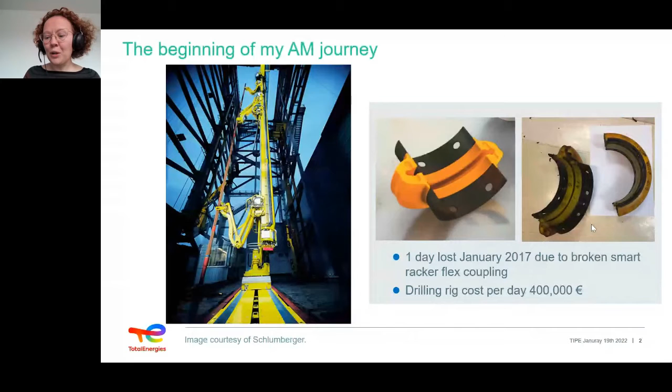Fast forward, this journey has moved from research and development into the digital organization of Total. I'll talk more about that in a moment, because Total Energies as a company is on a super exciting journey. What I've shown you so far is the old school days of drilling for oil and gas, and we're resolutely moving away from that into a super exciting future. This is a corporate slide that reflects Total Energies' new ambition, which is to be a major player in the energy transition.

Total Energies is committed to providing affordable, clean, reliable, and accessible energy. We want to increase our energy production while reducing the emissions associated with this production. And it's that challenge that we must meet with our customers, stakeholders, and society as a whole in order to address the issue of climate change.

We promote renewable, decarbonized energies. We produce and make fuels, natural gas, and electricity. So that gives you the overall view of what the company does. And in particular, we're investing massively in solar and wind to become one of the top producers of renewable energy, top 5 producers by 2030.

Below here, you can see all the energies that we now focus on. You can see that it's a lot broader than what it used to be, and a lot of effort is being put on the newer energies to the right. I'll show you how additive manufacturing is contributing to those as well.

There are 4 main pillars in this strategy: focusing on natural gas, biogas, and hydrogen; becoming a world leader in electricity; decarbonizing, which means reducing the emissions related to the oil and gas that we will continue to produce; and going as far as developing carbon sinks, investing in ecosystems that can naturally sequester carbon. So this is all very exciting.

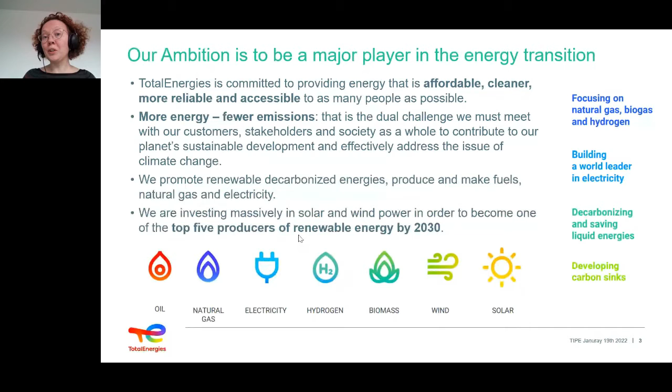And it's in that context that I've been asked to continue working on 3D printing, and in particular on digital inventory, which I'll come to in a moment. So what's the business case we see for additive?

We took the first few baby steps in 2018, and even before. You could say it's been 10 years since we started down the road of additive. And what became clear very quickly is that sometimes you have the opportunity to make a relatively simple, non-critical component, and if it addresses a critical shortage in the field, it can save significant cost.

These two examples from 2018 both saved us hundreds of thousands of dollars. This component on the left, for instance, was designed, printed, and shipped to Nigeria in 10 business days. So this really opened our eyes to how quick additive manufacturing can be.

So if you can reduce your lead time - for instance, it used to take 20 weeks to cast an impeller, but if we can now print it in 2 weeks, then why would we need to store it on the shelf? Could we not imagine encouraging our supply chain to give us virtual spare parts that we would print on demand? That's what we mean by the digital warehouse, the digital inventory.

Now, of course, so far we've spoken of ISO design - you're not changing the shape drastically, that's not the main goal, it's all about reducing lead time and inventory. But we're also interested in going much further with additive manufacturing to improve the efficiency of our equipment and reduce their footprint. Some interesting examples you can see here are valve trims and heat exchangers.

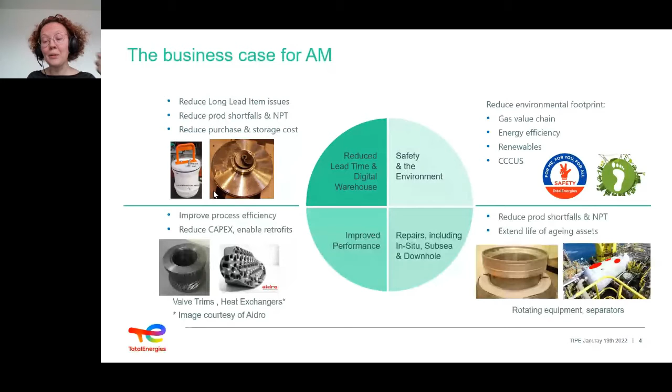So we decided to prove that we could overcome that barrier. And that's the next part I'm going to show you.

So if you have drilled a well, and then you take your drilling tool up and you run a casing to hold, let's say, the formation, to consolidate it and make sure your hydrocarbons are separate from the environment. That is a barrier, a protection. And while you're running this down into the hole, you are exposed because this is not directly compatible with the mud pump and the drilling pipes that are on the rig. So we need to have an adapter ready to be used in case something goes wrong, in case we have a loss of well control.

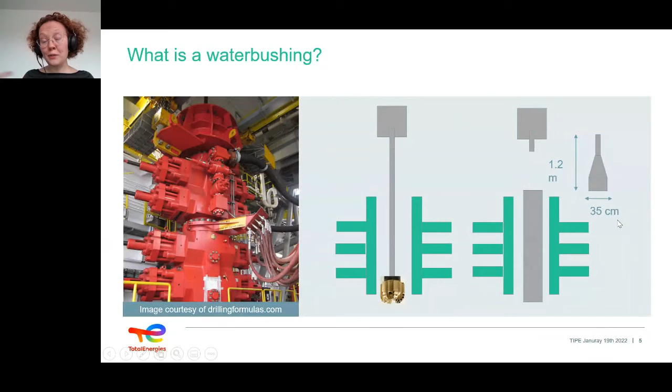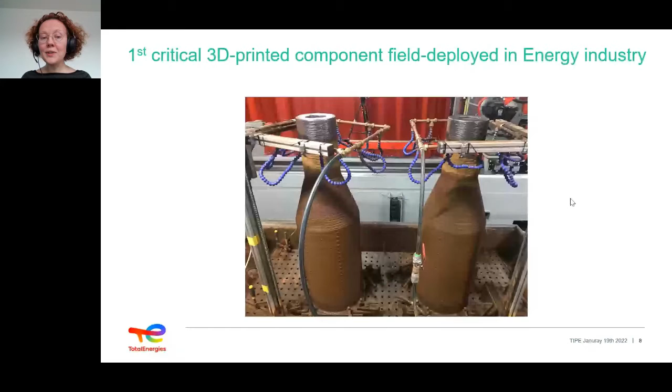And so that's this piece of equipment here. You can see we're talking a 1.2 meter piece of equipment. Here you will see it printed by wire arc additive manufacturing, layer by layer. And here you see it after machining, threading. If it didn't say world's first wire arc water bushing on it, you would have no idea that it was 3D printed.

We were actually unexpectedly able to reduce the weight of this item because normally it's made from a 1-ton forging that is this wide, and you only machine off as little material as you can get away with because machining cost is expensive. It means money. So you end up with a part that goes from 1 ton to 500 kilos and retains a lot of useless bulk here.

But in this case, our partner Vallourec suggested we redesign the part and go to the smaller size much earlier in the manufacturing process. Hence, a part that only weighed 350 kilos at the end of the wire arc build, and after machining we were down to 250 kilos. So you see a saving of 56% comparing to the conventional part, and much less waste in raw material. This also translated into a CO2 footprint reduction of 45%.

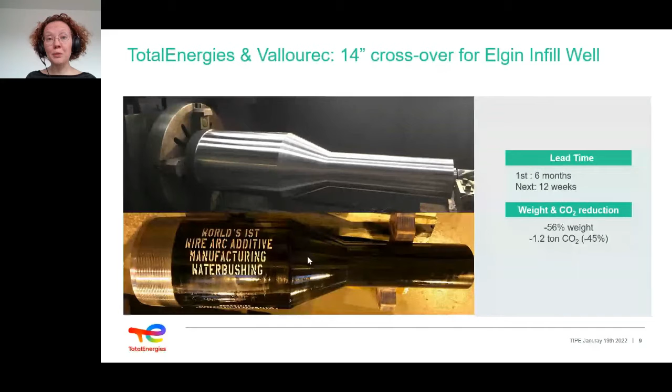Here you see the part pressure tested. And here you see it field deployed in February 2021 in Scotland, on the same site you saw in the first picture. So the circle was complete to some extent. My dream from 2017 had finally become reality.

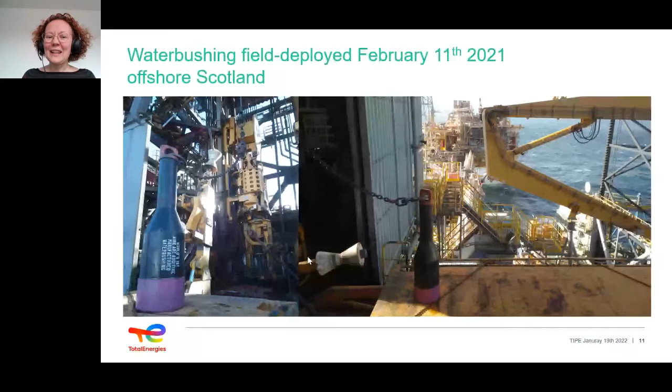Now, because everything went well in this drilling operation and the well was in control, we did not need to use it. So it went back into the warehouse and it will come out again next time we drill a well.

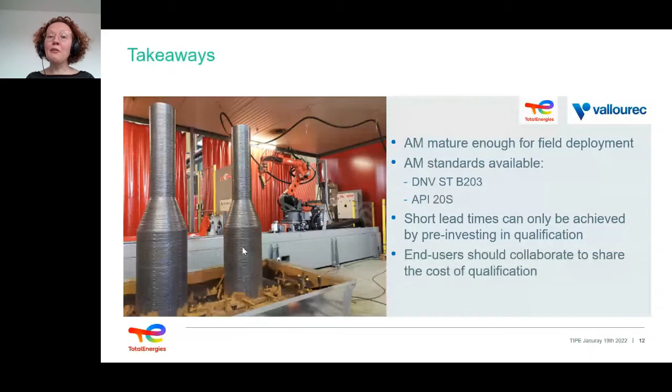Of course, this was challenging in the sense that we had to make 2 components as per the DNVGL guideline, which is now a standard, which Valeria also mentioned in her presentation just before. Making 2 components and destroying one to prove that the other is fit for purpose, of course, costs money. So that's the challenge we have, and we have to be smart about this. It also takes time, so we need to decide ahead of time which components we need, and if possible, work with others to share the cost.

Here is an example of our second safety critical component, which is almost field deployed, so close. It took about 2 months to print and to test in Scotland with Technip FMC. Then the component was shipped to Congo, which took a while. Hence, again, that dream that many of us have of actually having in-country 3D printing capabilities in some of these places. I'll get to that in a second.

The final testing, pressure testing, and coating has been done. So now we're really just waiting for this to be installed on a Christmas tree in the field. So this, just like the previous component, is a temporary component. It's at surface, it's easy to inspect.

So we're still some way off from being able to put components in a well, quite a distance below surface. But these are still very exciting breakthroughs, and it shows that you can have a component quickly, even if it is critical, like these two components are.

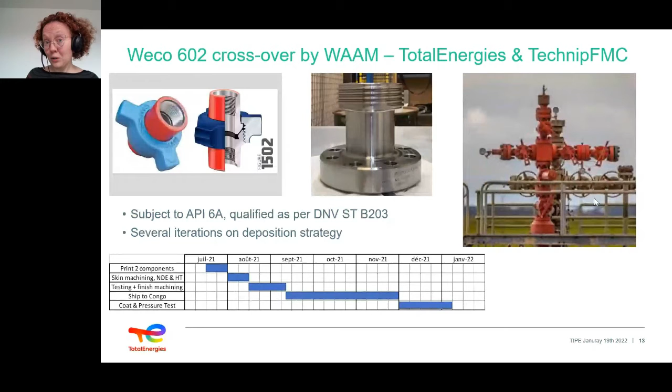Now, the next subject I'm going to talk about is the digital warehouse, because this is my current focus in my role today. It's this idea that it's great to have some parts, but if we want to scale the number of AM parts being used, there's something missing, and that's the digital thread to achieve a vision.

This vision I mentioned at the beginning is our suppliers making spare parts available to 3D printing facilities across the globe, so that we as an end user can click, place an order, and receive the part with as short a lead time as possible. We cannot convince our maintenance engineers to stop putting parts on the shelf if we don't have a firm belief and good assurance that that short time will materialize.

And if we wait for each of our original equipment manufacturers to invest in their own hardware and print in-house every part they make, it's going to take 15 years, and we cannot afford that. We need to speed up that transition.

So it's really important to go from a linear supply chain to a circular supply chain, where the company that comes up with the intellectual property, with the design, can rely on others if needed to print it, in order to have some supply chain flexibility.

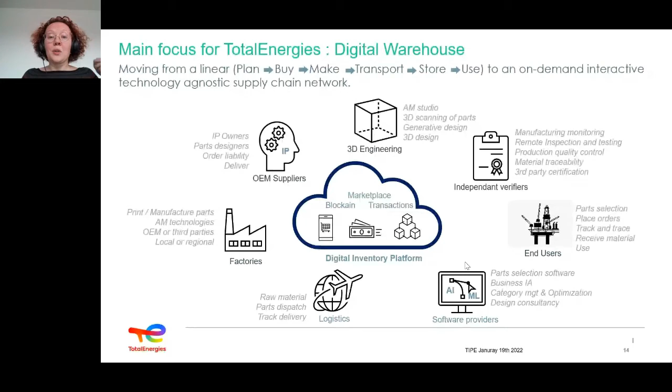So in order to make this vision come true, we've partnered with Equinor, Fieldmade, and Siemens, who had already together built a first version of a digital interface. We are currently in the process of testing that together. This product, which will be launched commercially in Q2 2022 and made available to many more end users and manufacturers, aims to address the challenges listed here.

How do you select the right parts? As an end user, we have many, and we don't have a lot of technical information about them. So how do we do that? How do we digitize them? They're not, let's say, designed for additive today. So how do we overcome that backlog of old parts, even if the future may be designing directly for additive?

How do we qualify the parts? As you've seen, it is possible, but there are still some roadblocks ahead. How do we share the value between the company that designed the part and the company that prints it? How do we generate trust in that circular supply chain? How do we secure that IP, track the transactions, and manage the payment? And how do we integrate this solution with our existing tools? We have ERPs for procurement and many other systems, and if we design something new without taking that into account, we will fail.

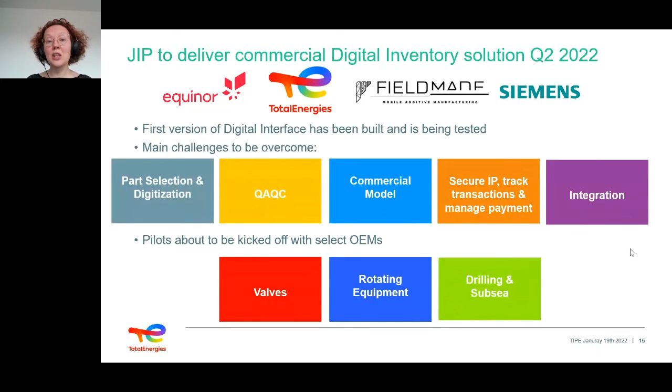So we are addressing all of this as a team. It's a super exciting journey, and we are kicking off, as we speak, some pilots with a few OEMs to make sure that our product also fits their needs. The categories of equipment we've already identified as suitable in the short term for this digital interface are valves, rotating equipment, and drilling and subsea.

So a few more words before the Q&A, just to give you a flavor of what the future looks like. We are exploring some very exciting topics at the moment. All these pictures here are widely available on the web. I cannot show you necessarily what Total is working on, but it's just to give you an idea and share some of the exciting success stories out there.

So here, for instance, you see MX3D making structural demonstrators, like a bridge, architectural elements, and they've also made a pipeline repair clamp. It's very exciting, it shows the potential, and we want to explore that—going back to that first picture of this big structure in the middle of the ocean, lots of steel. What can we do to make that leaner, to make it lighter? If we redesign it, we imagine there's huge potential to make it lighter.

And Aidro have also shown some very interesting examples with hydraulic manifolds, so that's also an area where we know there's so much to be done. Again, like many other end users, it felt easier to think ISO design, just replacing a spare part. But we've really embraced the fact that we need to go to full redesign together with our OEMs to reap the real benefit of additive.

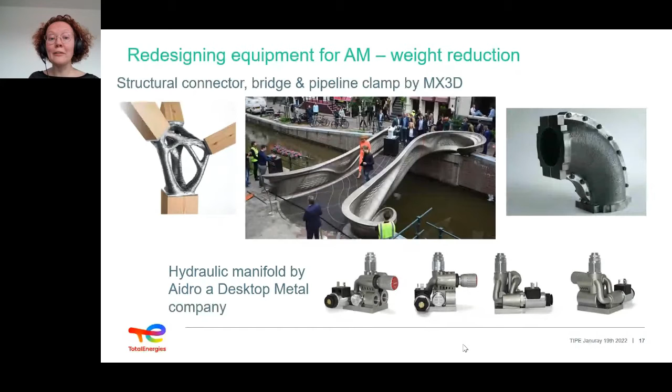And so that will one day apply to our Christmas trees. What is that? It's essentially some valves on the seabed, and they're expensive, with extremely long lead times. Today, their engineering—the way they're built—is driven by the fact that you need to build the body, but then access it internally to, for example, clad it with a different material, to add features.

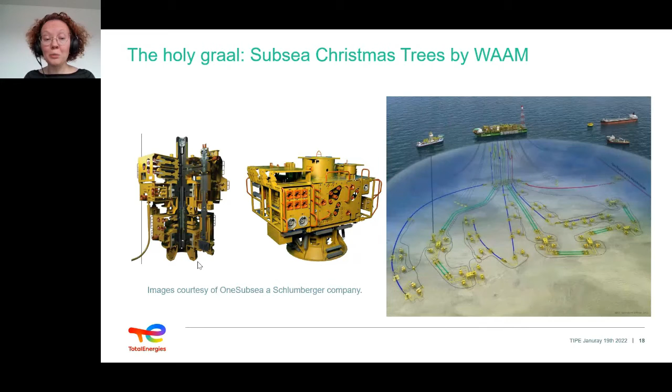And what we would like is to be able to make these layer by layer, maybe with several materials, on our printers. We're thinking wire arc for this, but who knows? And yeah, to redesign them completely for AM, make them lighter, more compact. We think that is something in our future, and we're very excited to embrace that challenge.

Here are some other very exciting examples, and now I'm starting to steer towards the future of Total. We're very focused on our own energy consumption and how to reduce our emissions. So we were very excited when Eureka Pumps shared this example where a single impeller in a pump can be redesigned to reduce the flow passages. And even if your production has gone down by more than 70%, you could still reuse that same pump. You don't need to buy a new pump, you just change one component. This component has been printed hollow, which would have been impossible with conventional casting. Thanks to this simple one component swap out, they eliminated all the noise the pump was making, and the end user had an electricity consumption reduced by 70%. So it's a fantastic success story.

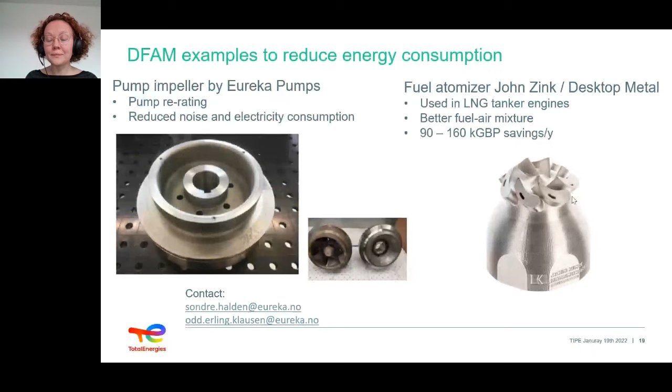Similarly, you'll be able to find on the web information by John Zink and Desktop Metal on this LNG burner they've manufactured, which saves considerable funds for LNG tankers every year, thanks to a better fuel-air mixture. This is, again, a super exciting example of what design for additive can unlock and how it can help us reduce our carbon footprint. And I think this is going to be my final slide today.

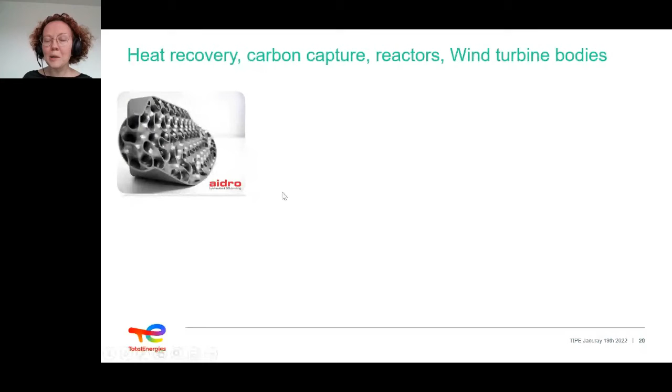I'm again going to show the Aidro heat exchanger as an example, just so you see, because the first theme is about complex small shapes. So you see the example here of this gyroid heat exchanger. Well, this is applicable, or something similar, let's say, to carbon capture, for example.

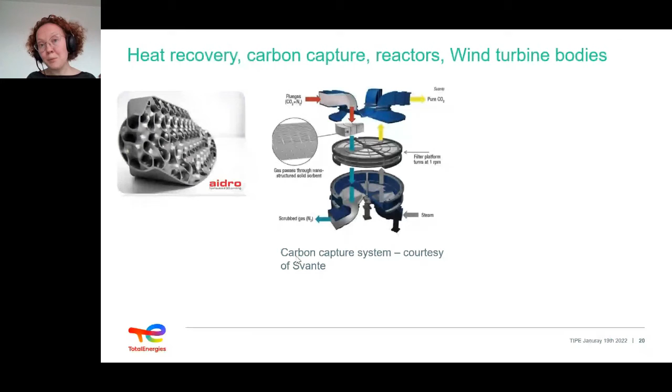This is an image you can see on the web, but a company that Total partners with, Svante in Canada, and their system, as many other carbon capture systems, have some complex shapes to them with small passages and where even the surface roughness can be important. So there is a million opportunities there to optimize that so that we can capture more carbon and make that process less expensive, and so that it can be scaled up.

Same thing if you're looking to produce hydrogen, or to combine hydrogen and CO2 to make other products, for example, which is something that Total is investing a lot of research funds into and has had some really exciting breakthroughs recently. And yeah, here again, 3D printing was a key enabler.

And now on a completely different end of the spectrum, we have wind power, where there's been very exciting information provided by GE and Holcim, which you can also go and see for yourself. They've shown that for an onshore wind turbine, you can 3D print the body with concrete, therefore making it bigger than what you could ever transport by road.

Because if it's too big, then you need to take the street lights down. It's extremely expensive to transport a really big piece of equipment. Well, if you 3D print it in situ layer by layer, you can make it much bigger, therefore much taller. You can reach areas where the wind is stronger, and you can improve the efficiency of your wind turbine by 30%. So again, we can see a very exciting future there, which Total will explore as we get into the offshore wind market.

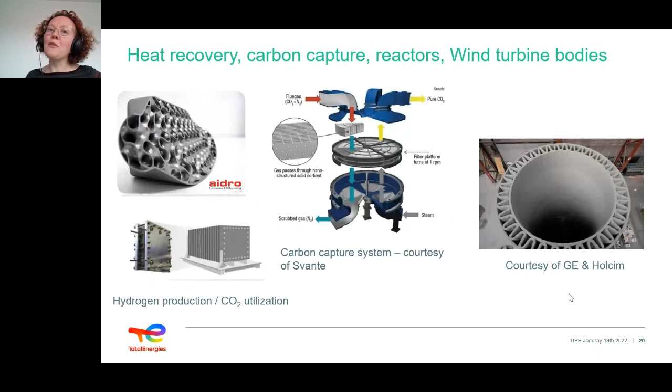And so that's it for me today. Really happy to take some questions.